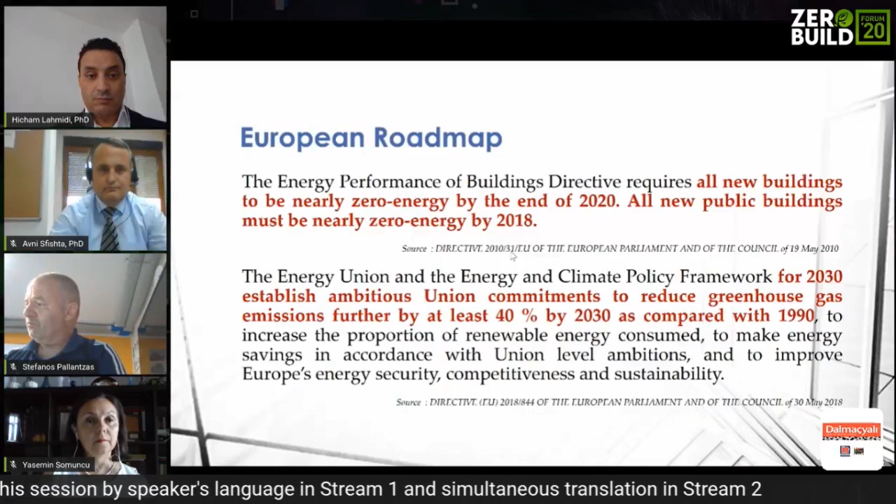On the same directive, we have other points related to improving the energy efficiency of the building stock, carbon neutrality, and near zero energy building. The union has committed to the development of a sustainable, competitive, secure, and decarbonized energy system by 2050. So under this directive, you can see we have a lot of objectives: short-term, mid-term, and long-term.

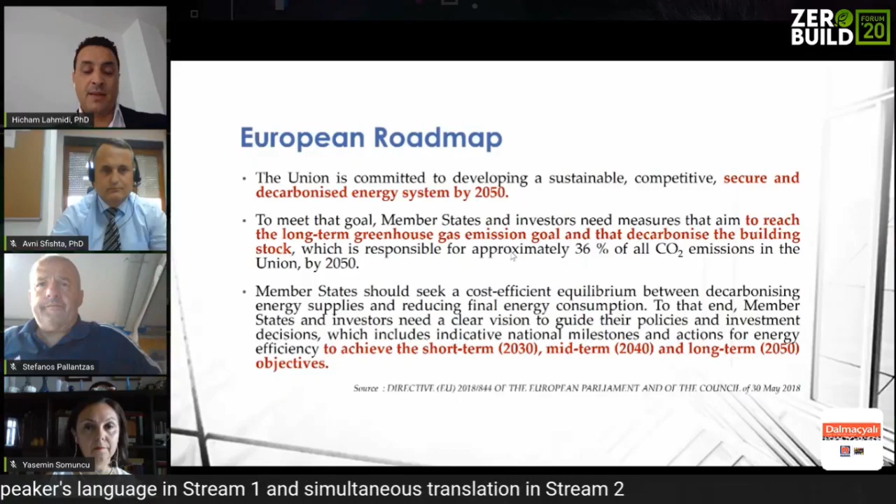Our idea is to establish a rule now and work on this roadmap step by step, and every 10 years make an evaluation of regional objectives, update regulations, and try to improve our system and create markets. This is the analysis of what happened at the European roadmap level.

Another point is related to mandatory energy improvement. I think you are aware that currently in Europe, and especially in France, we have a lot of obligations of means. Our objective from this year is to change this philosophy and move from an obligation of means to an obligation of results, so to focus more on verifying results rather than means calculations or something like that. This is the first philosophy adopted this year.

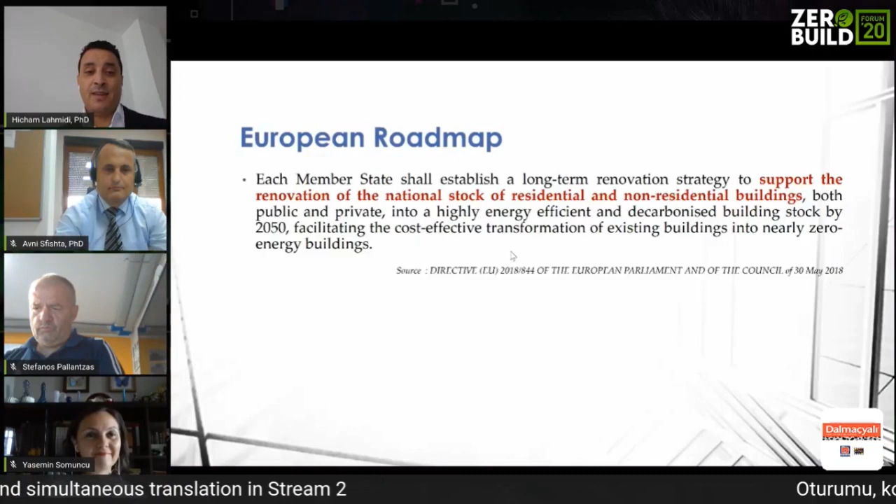And there is another one. So in each regulation in France, each time we have some rules related to fines. If there is no compliance with the regulations, you have to pay a fine. So from 2020, the ministry decided to move from this process of applying fines for non-compliance to establishing rules based on name and shame. If there is no compliance, the stakeholders, architects or engineers, will have their name on a blacklist, and name and shame will probably help move things in a good way and reach our objectives.

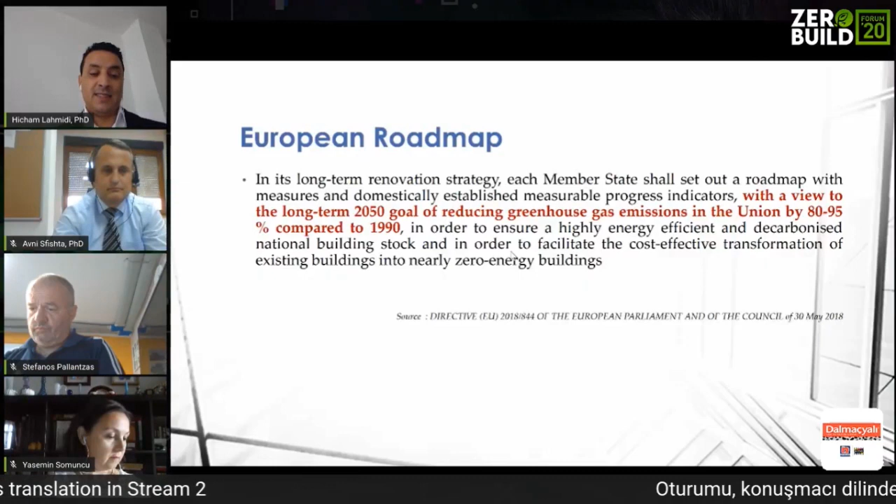Another point that is very important for us at the European roadmap, which we are starting to transpose into the French market, is a mandatory energy improvement for tertiary buildings. As you know, the big problem is related to existing stock buildings more than new construction. With new construction you can imagine what you want, but with existing buildings you have to take into account constraints, and it is not easy to move them to near zero energy or low carbon.

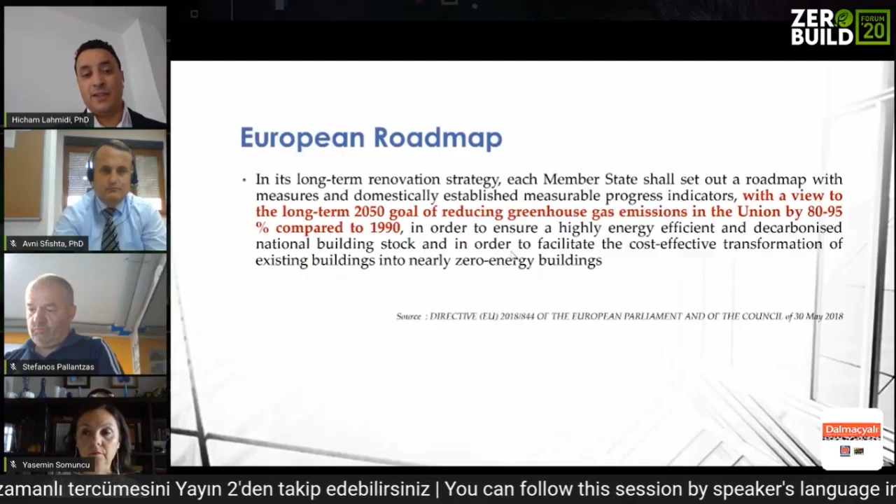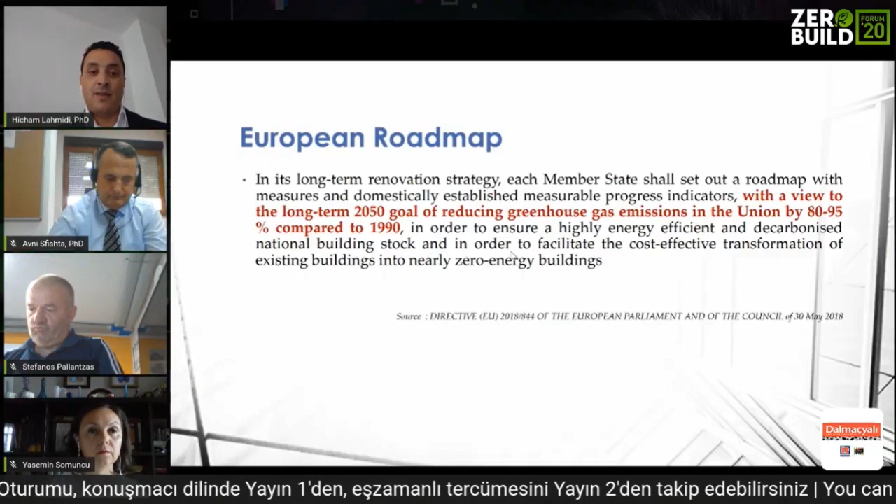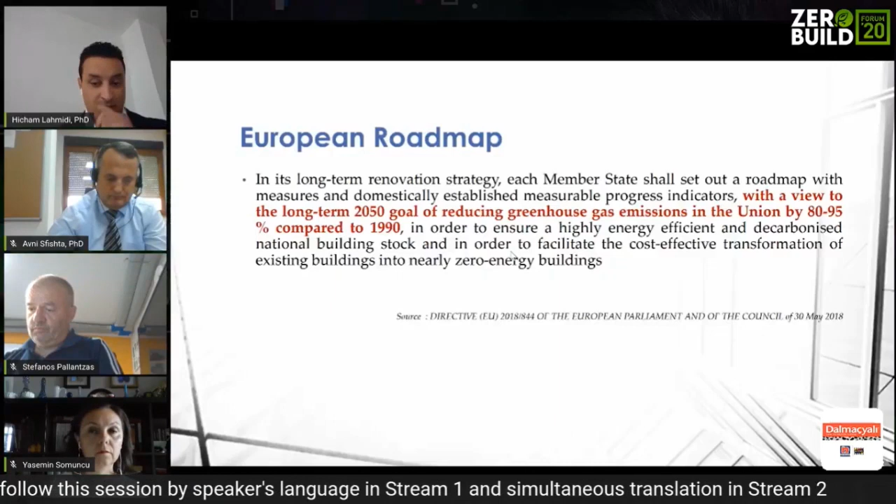So in France, based also on the European roadmap, we decided to establish rules from last year with a mandatory energy efficiency improvement for the whole tertiary building sector, with three steps of targets. The first target is fixed for 2030, the second for 2040, and the last for 2050. Based on the same rule I highlighted before, it is not an obligation of means but an obligation of results. You have to prove that you reach a reduction of energy consumption, and the level is very high: a reduction of 40% of real energy consumption by 2030, 50% by 2040, and 60% by 2050. This is what we are working on today in France.

And there is another subject in new constructions. Next year we will have a new regulation, and I will present in detail what will be the kernel of this new regulation. Let's move on after this short presentation of the relation between the European roadmap and the French roadmap, and focus on the French situation regarding buildings and energy consumption in general.

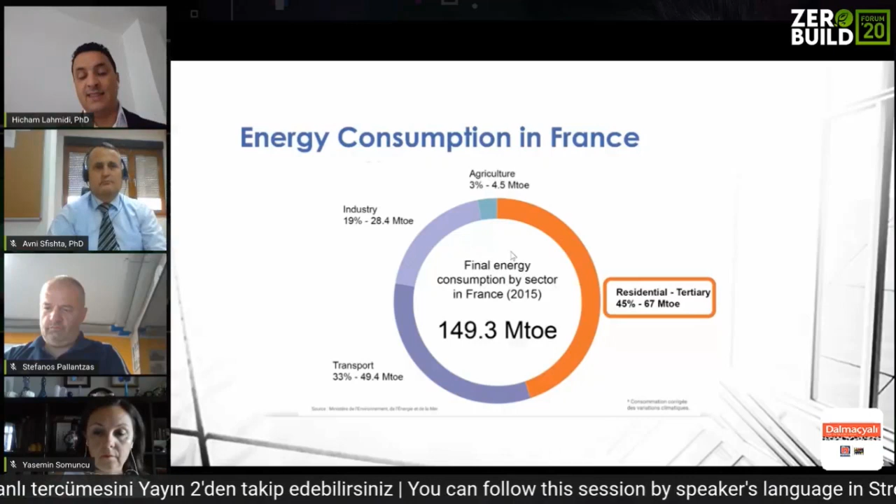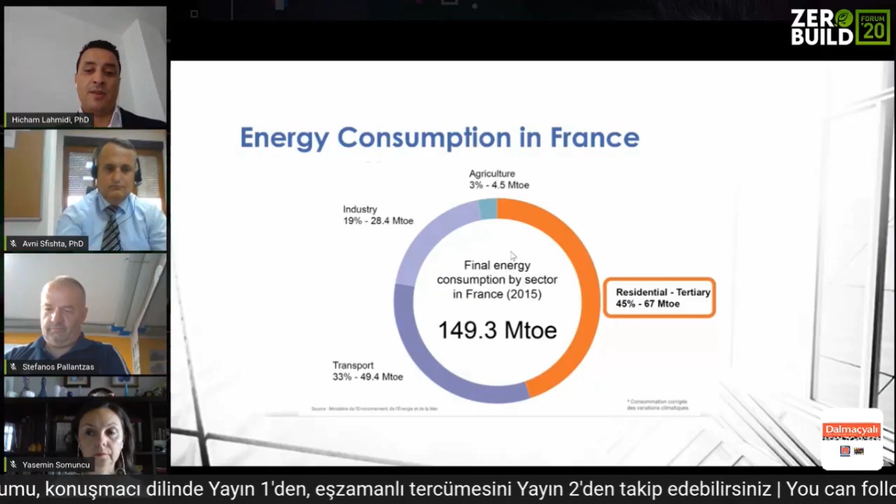We try to be an example in France and in Europe by reaching zero energy building for new constructions, low energy building for existing stock buildings, and carbon neutrality for part of our buildings by 2025, moving the whole sector to carbon neutrality and near zero energy building for new and existing buildings by 2050. This is our philosophy. Just to give you an idea, our energy bill for the whole sector in France is about $65 billion, so it's very important: if we can have an impact on buildings, we will probably have an impact on this $65 billion.

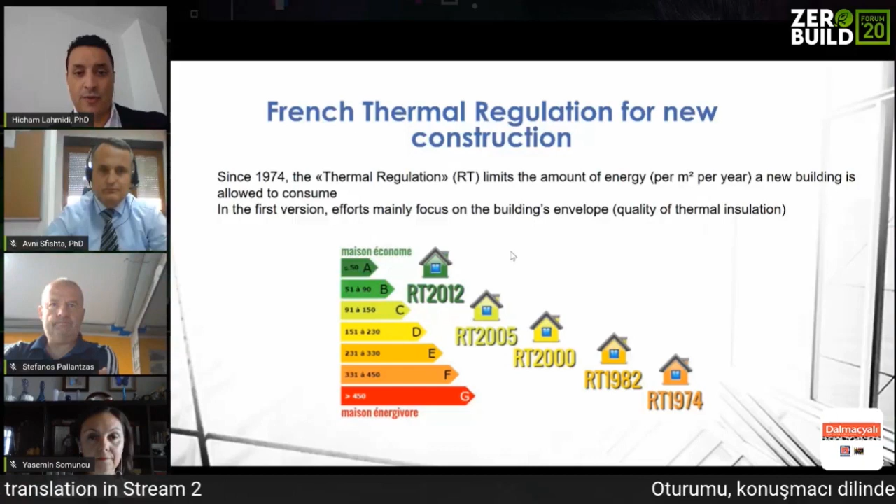Our philosophy is that we cannot just focus on existing buildings and forget what can be applied to new constructions. So our ministry decided to establish rules for renovation of existing buildings, but also for new constructions. The rate of new buildings in France is less than 2%. We have a big experience with thermal regulations for new constructions; since 1974 we established thermal regulations for new constructions, as an answer to the petroleum crisis. At that time it was just focused on insulation, and every 10 years we update our regulations to take into account the new context.

But the next generation of regulation will not be just thermal regulations. We are moving to environmental regulations, because we want to introduce life cycle analysis for the whole materials, but also zero energy building. So to reach this objective, we established a mix between low energy building and low carbon buildings, and it is now established. It's not published, but it will come into force next year.

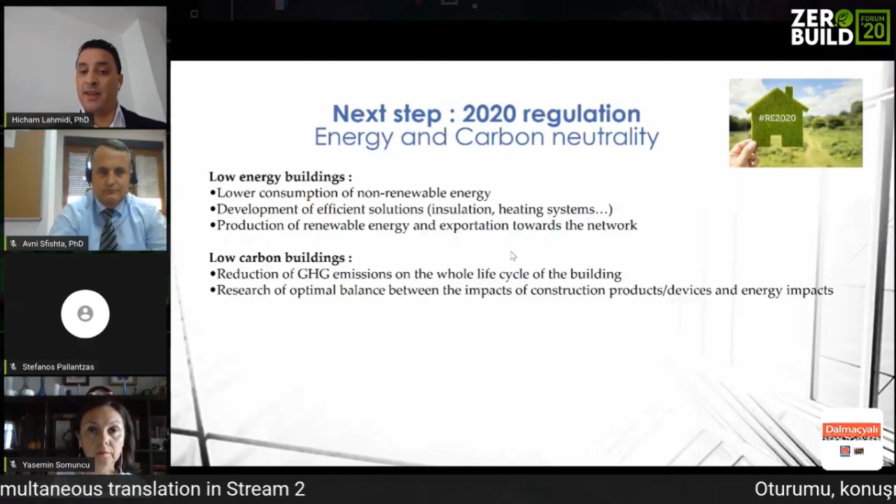Our objective for low energy building is lower consumption of non-renewable energy, development of efficient solutions, and production of renewable energy at the level of the building or the neighborhood. For low carbon buildings, our objective is a reduction of greenhouse gas emissions over the whole life cycle of the building, so each product will be characterized, and calculation will be based on the life cycle of each product.

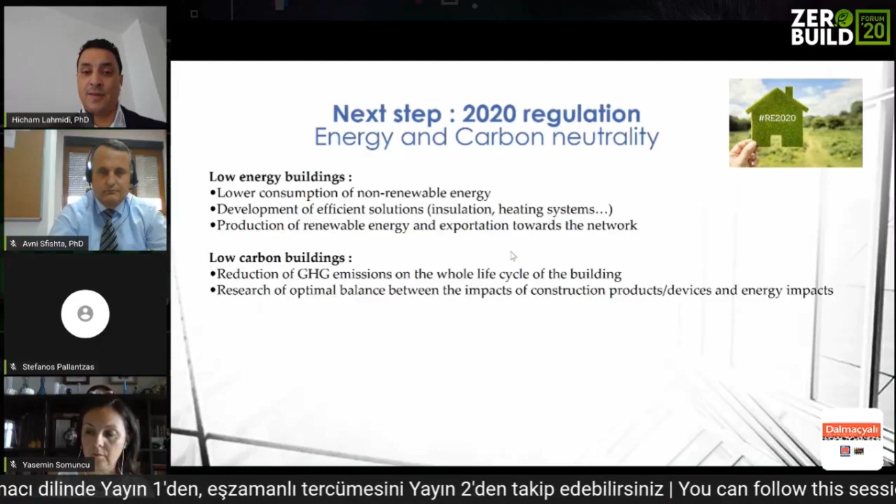The idea is to introduce the definition of circular economy at this level of regulation, and to create a movement under these two subjects, in order to create learning and, by the end, reach our objective. The philosophy will be the same as applied for near zero energy building.

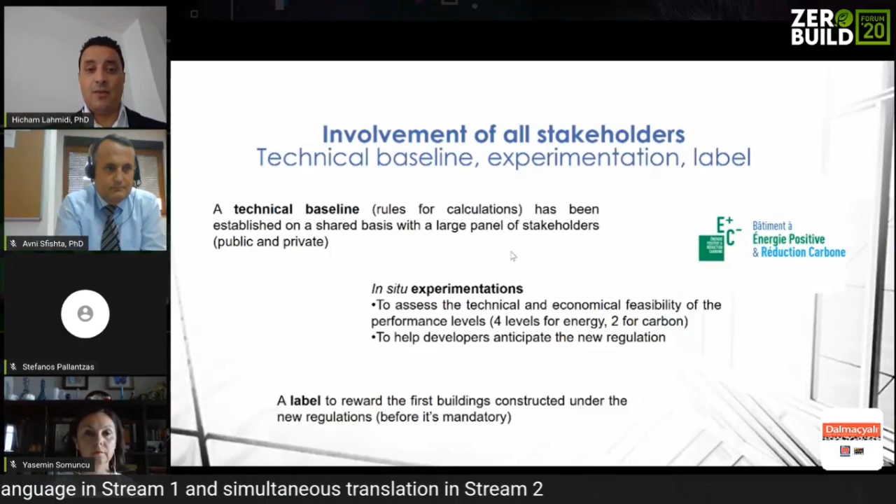As this is our first experience with the mixture between energy and life cycle analysis, we established a label: a positive energy and low carbon construction label. It was established under in situ experimentation, and the idea is to involve all stakeholders during 3-4 years to learn from these experiments, get feedback on the rules, update the rules, and introduce these rules and techniques into the regulations, which is currently ongoing.

Life cycle analysis is a new subject for architects, for engineers, for stakeholders, but also for administrations. So under this experience, we will have feedback and introduce these regulations, which will come into force next year.

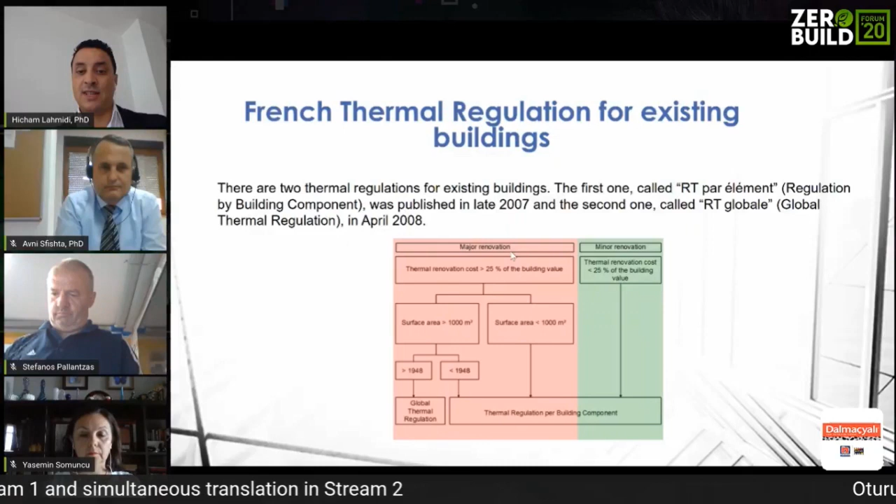Regarding existing buildings in France, we have thermal regulation with two levels depending on refurbishment: major renovation and minor renovation. Minor renovation applies to just building components, when we make replacements of windows or something like that. But if you have a major, very big renovation or refurbishment, you have to apply major renovation rules.

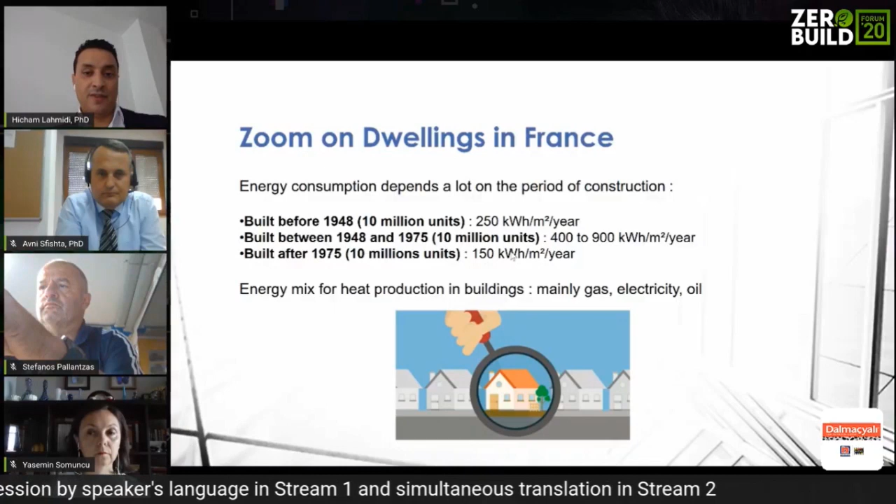This came into force in 2008. There is no project of updating the regulations, but what we observed in the market is that our dwellings depend on the level defined in each regulation. So before establishing the regulations, buildings built before 1948 - we have more than 10 million units - have a rate of about 250 kilowatt hours per square meter. After the war, between 1948 and the first introduction of regulations, the level is very high, between 400 and 900 kilowatt hours per square meter per year. But after the establishment of regulations, buildings became more and more efficient, so currently we reach around 150 kilowatt hours per square meter per year.

In France, we also decided to increase the sensitivity in big companies about energy efficiency. We started first with an obligation of means - obligation to carry out an energy audit without any obligation to actually improve energy efficiency. But once stakeholders in each company become sensitive to energy efficiency, they will make analysis and probably move toward improving energy efficiency.

If it doesn't come with this mandatory energy audit, it will probably come with the second text of law, related to mandatory energy improvement for tertiary buildings. The origin of this mandatory energy audit was also the European directive, introduced through Article 8, mandating energy audits for big companies, with exception for activity covered by ISO 50001 certification.

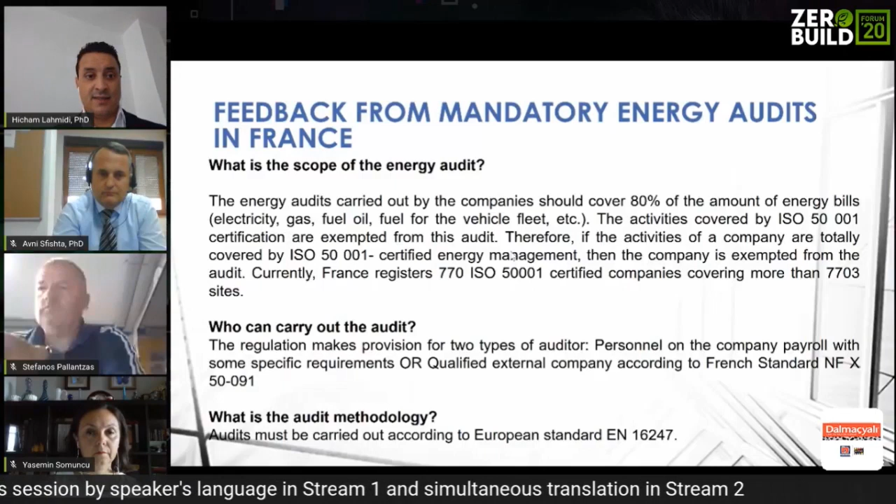In France, we decided that companies with some qualification can carry out the energy audit. The qualification is not related just to the person, it's related to the company. The methodology adopted and made mandatory for carrying out the energy audit was the European standard 16247. Lessons learned from the first campaign are...

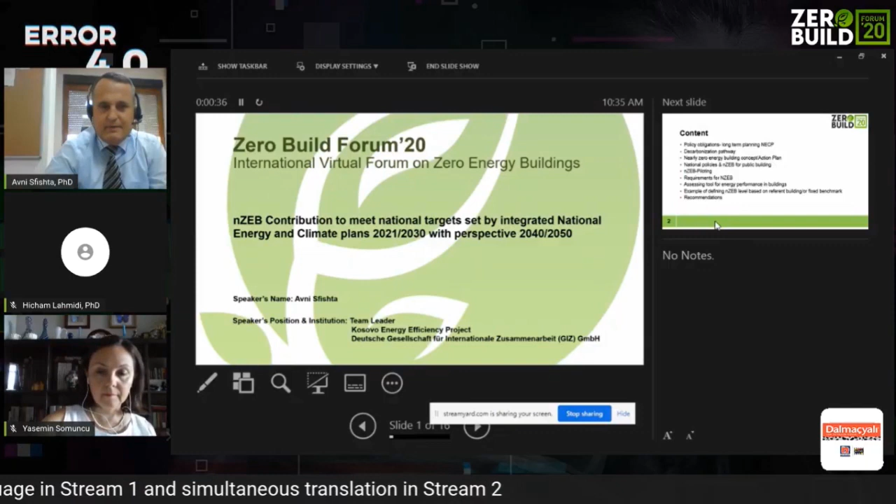Thank you very much, I'm honored to be together with you today. I will just try to switch my presentation. Can you see it now? Yes, we can see it, and if you can put it in presentation mode, it will be perfect. Yes, yes, thank you. Okay, we can see, Dr. Sfishta, we can see your notes also, so maybe, but it should be no problem. Yeah, I don't have notes on the side, so I think it's fine. Once more, thank you very much for having me today with you and also giving me the opportunity to share our experience on the development of the National Energy and Climate Plan, but related to near zero energy buildings, and in this perspective of long-term planning, 2021-2030, and having some goals towards 2040 and 2050.

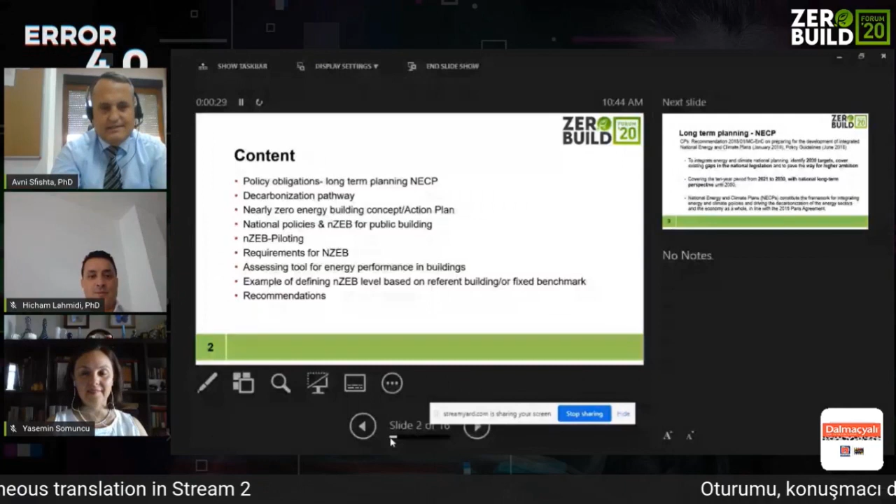So I was saying, I'm going to present today the long-term planning on national energy and climate plans in relation to building renovation, nZEB application, and setting the standards for this long-term planning for 2021-2030, with the perspective of 2040 or 2050.

As you most probably know, all the Balkan countries which are not members of the European Union are members of the Energy Community Treaty, and they have the obligation of a transposition process of the EU directives. In that line, in 2018, all the countries which are members of the Energy Community agreed on developing a national energy and climate plan, and also in 2018 a policy guideline was developed on how this plan should look.

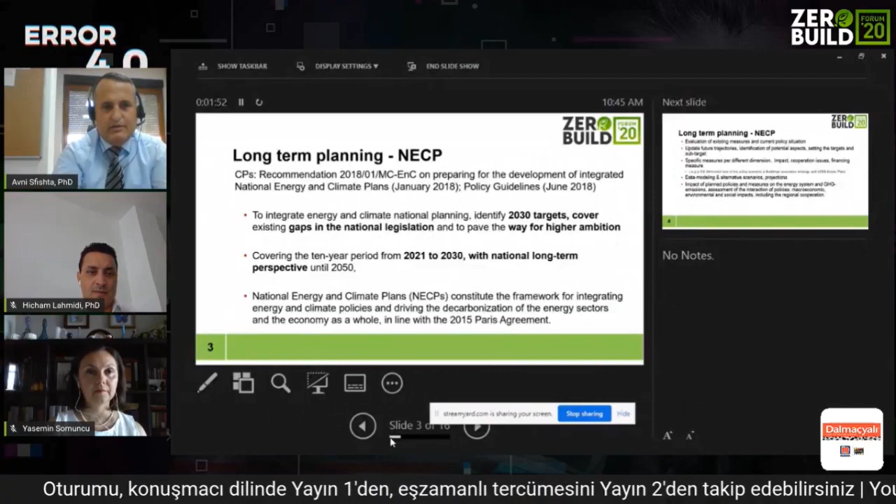The plan is an integrated energy and climate national plan that sets the targets, as I said, for 2030. It's meant to cover the gap in national legislation and pave the way towards a higher ambition on this decarbonization process. The plan constitutes the framework for integrating energy and climate policies and driving decarbonization in the energy sectors and the economy as a whole, and it's in line with the Paris Agreement.

What the plan consists of: first, the evaluation of existing policy and measures set in the country, then what should be the future trajectories, identification of potential aspects, setting the targets and sub-targets in different sectors or sub-sectors - how much can be achieved in terms of energy saving, what type of measures should be taken into consideration, and what are the impacts of these policy measures.

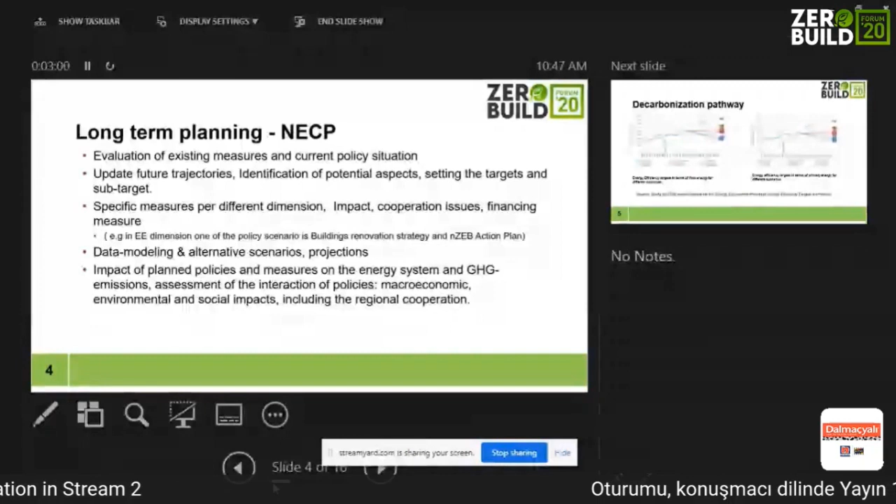In specific, one of the dimensions of energy efficiency, the plan also has the building renovation strategy. There is a near zero energy building action plan. On top of that, there is data modeling - data about energy consumption, about the policies and what effects these policies will give in the long run, but also in terms of impact on greenhouse gas emissions, interaction with other policies in the macroeconomic environment, and also social aspects.

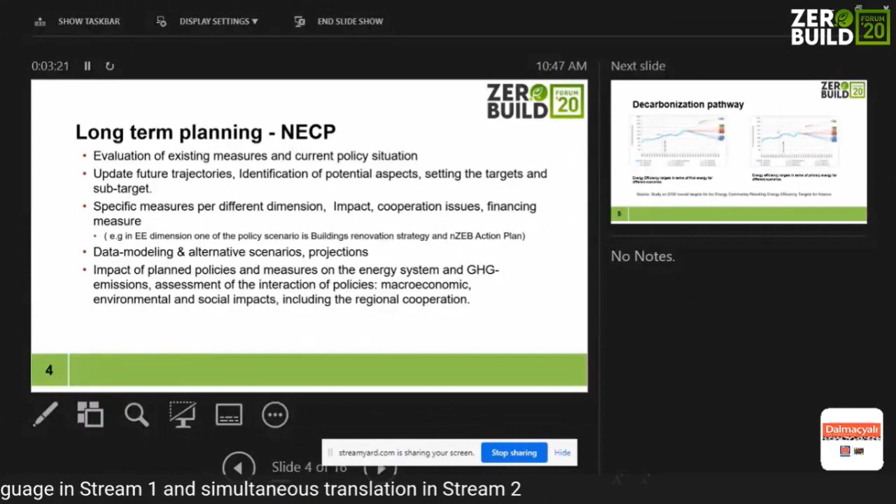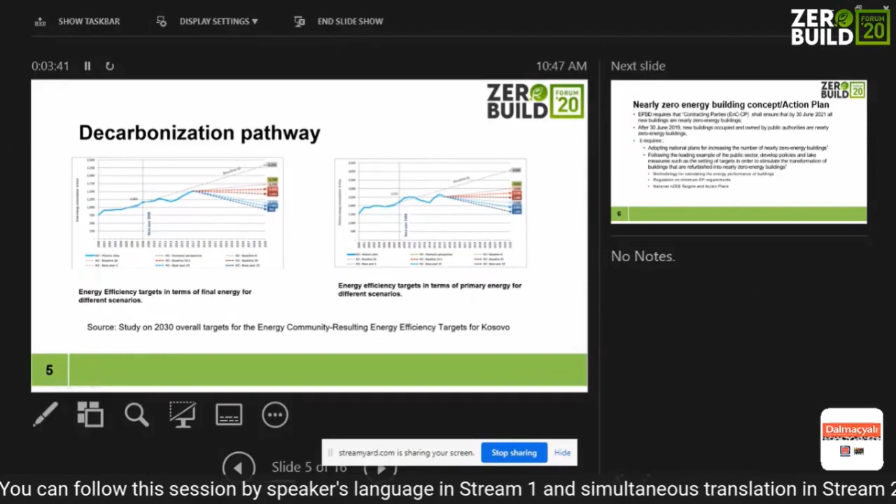So here is one graph that presents the different targets based on different policies, different measures, different political decisions. In the graph you can see, for example, if the country does nothing, what will be the total energy consumption, and based on different measures that will be taken, what could be the savings and what will be the overall energy consumption, expressed in final energy consumption and also in primary energy consumption.

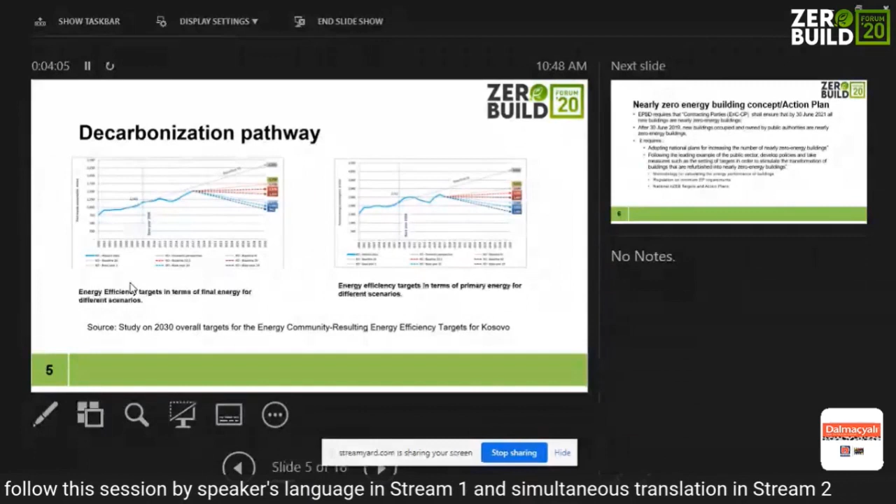Related to today's topic, I would like to link with my previous speaker: we have transposed the Energy Performance Building Directive, and for the contracting parties of the Energy Community, they shall ensure that by 30th of June 2021, all new buildings are near zero energy buildings. So for buildings that will be constructed, they have to meet a certain standard in terms of energy consumption, and of course be low energy consumption buildings.

According to the directive, after 30th of June 2019, new buildings occupied and owned by public authority are near zero energy buildings. This directive requires adoption of national plans for increasing the number of zero energy buildings, which we have developed. We do have the draft, and at the moment it is in a discussion process for adoption. It also requires that public authorities should lead as an example in terms of developing policies and taking measures in setting the targets.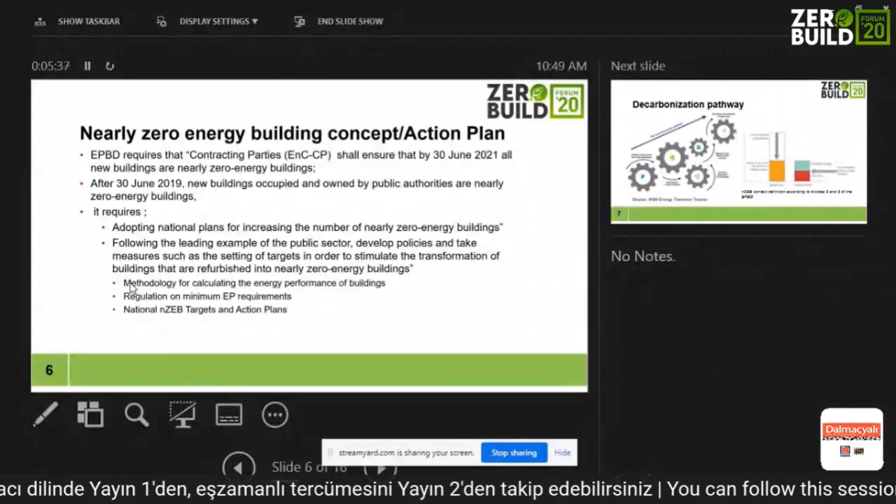On top of that, the government developed a methodology for calculating energy performance in buildings, which is in line with the Energy Performance Building Directive. They developed regulation on the minimum energy performance requirements, and also definition or setting of national nZEB targets on the action plan.

So what it means is we are talking about the current national requirements. The buildings have to be renovated or constructed at a level that reduces energy consumption to a certain level, and for near zero energy buildings, it means on top of that adding renewables, which contributes to reduction of fossil fuel use in very low amounts. By this, we talk about technology, we talk about the labor, we talk about the market.

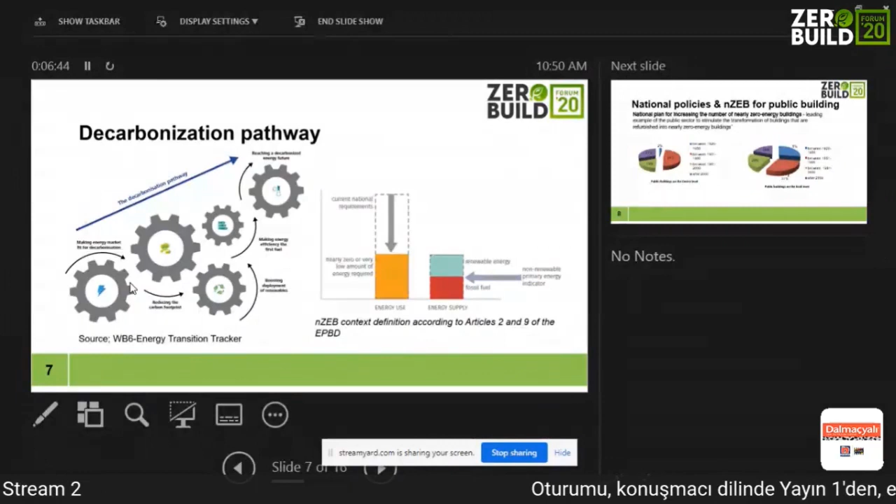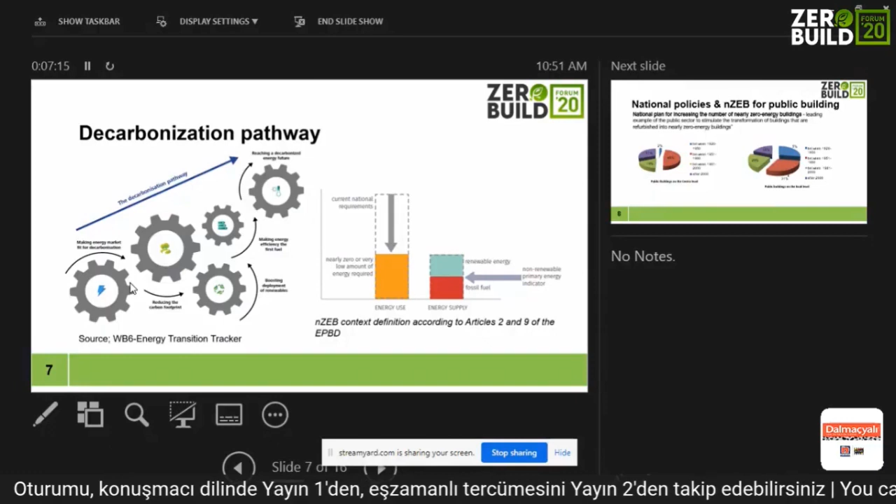Energy Community this year published this transition tracker, and I linked this area also with this tracker, because for example, on near zero energy buildings, we are talking about making the market decarbonized, reducing and contributing to reducing the carbon footprint, boosting development of renewables. As you will see on my next slides, a certain amount of renewables has to be produced on site or on the building that is near zero energy, and of course making energy efficiency the first fuel.

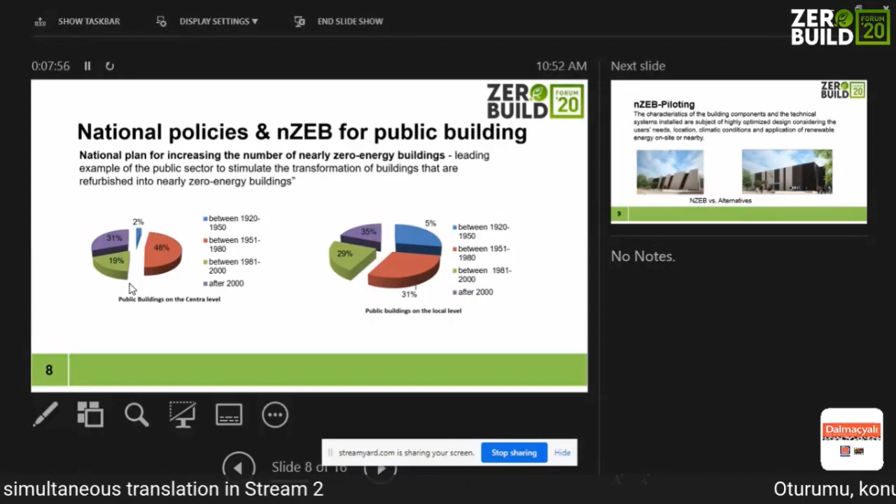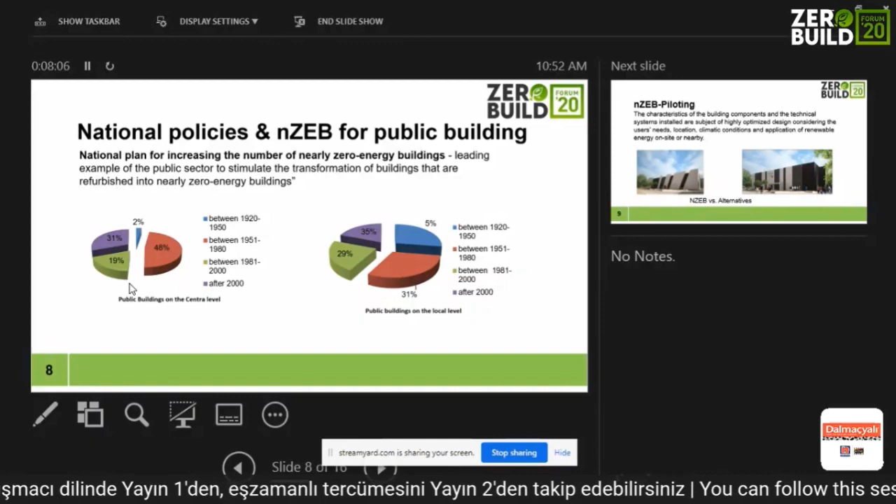What was done on the central level and on the local level, from the public authority side, is the national plan for increasing the number of near zero energy buildings. Most of the buildings, or a large number of public buildings, local or central level, have been audited. They have been split based on construction year to identify where there is higher potential for energy saving, and also to check what kind of measures and intensity of measures can be taken for these buildings to comply with the requirements I explained before.

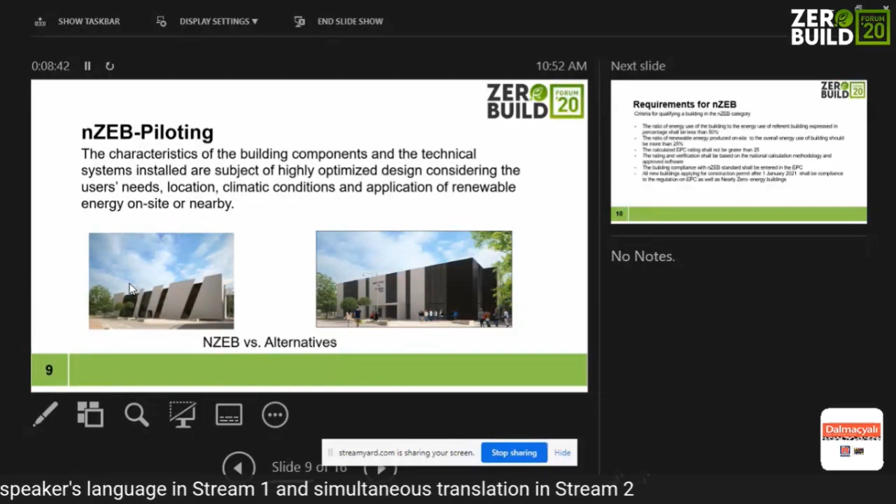Here I'm bringing one example, so it means nZEB doesn't have to be rocket science, it is a normal building. Here is one building which was designed on the nZEB concept, with different options provided by the architects and engineers. What it means is that the characteristics of these buildings, building components and technical systems installed are subject to highly optimized design, considering the user's needs, location, climate condition, and application of renewable energy on site or nearby.

So by our policies, what is considered a building that falls in this category of nZEB is that the ratio of energy use of the building to the energy use of the reference building, expressed in percentage, shall be less than 50%. It means by setting minimum energy performance requirements, we set, let's say, the worst acceptable standards of energy efficiency in buildings which are accepted.

But if we want to reach a level where the building falls into this nZEB category, these buildings have to be doubled in terms of better insulation, having better optimized technology and application of renewables. Then the ratio of renewable energy production on site to the overall energy use of the building should be more than 25%.

In the energy performance certificate, it has to be also rated, and the rate should not be more than 25. So it's not in terms of kilowatt hour per meter square annually, but it's based on comparison between the building that we are assessing and the reference building.

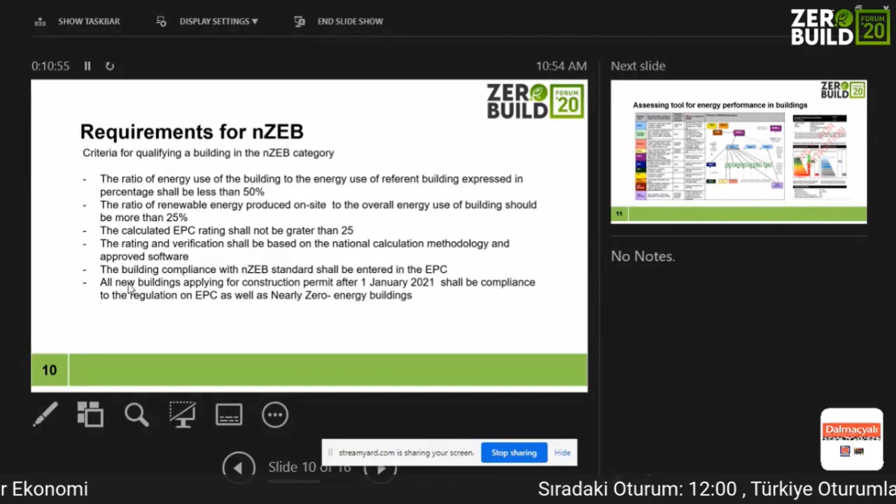The reference building is created by the calculation tool, by the software. So when you insert the data inside, the software in parallel develops, or creates, the same building while taking into account the minimum energy performance requirements. So it means the policy requirements that are set a priori are in the software library.

But when we do assess, we put all the data from the real case. Then at the end, when you do a calculation, the software will make a comparison between the building that fulfills the standards and the building that we are assessing. The rate between these two, when you do the calculation, should not be more than 25. Then the verification should be based on the national calculation methodology, so basically how this assessment of energy performance of the building is done should be in line with the calculation methodology.

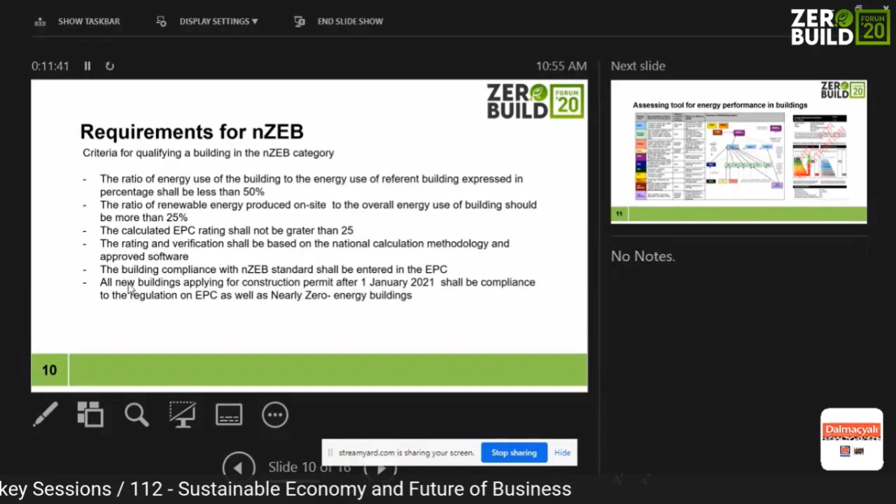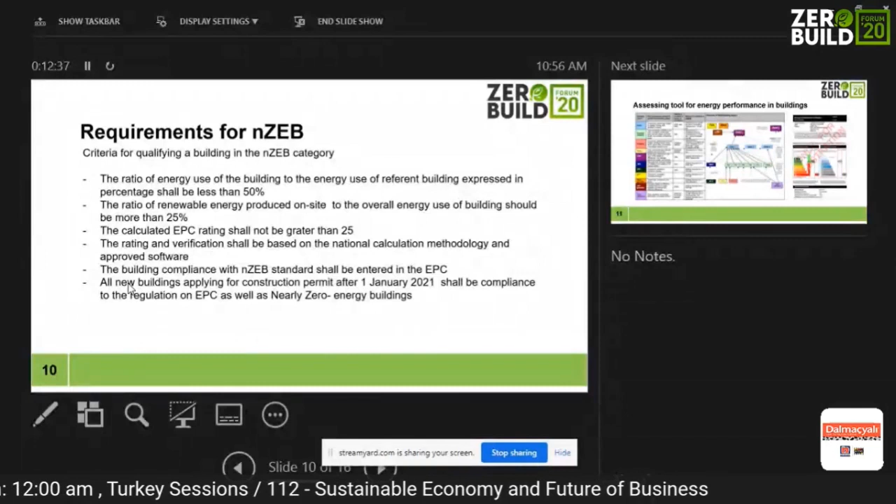From the 1st of January 2021, all new buildings applying for a construction permit in the country have to be compliant with these minimum energy performance requirements, and also be equipped with an energy performance certificate at the design level. So when the building is being designed, an energy performance certificate is issued for the design, and when the building is constructed and reaches the phase of technical acceptance, or the certificate of usage as we call it, another EPC should be conducted to check if the building complies with these regulations.

So how is this assessment done? Basically, when assessing a building for refurbishment or a new building, you split the building into different zones, and for each zone you assign the envelope of the zone, and what type of heating, ventilation, or air conditioning system is in that area. The division of these zones is based on the uses or purpose of these areas, and also some technical criteria, for example around lighting or natural lighting.

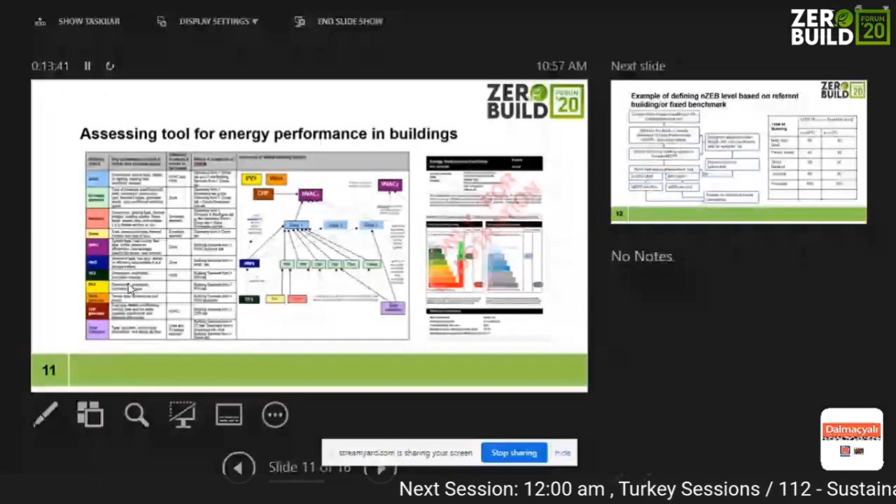So you assign all these systems to the zones of the building you assess, and then you do a calculation, and based on this you get the rating on the certificate. To meet minimum energy performance requirements, this rating should be between B and C, and if it's at nZEB level, then it's between A and B.

The process itself for assessing such buildings is: you create a virtual model of the building in a calculation assessment tool, and then you attribute the fabrics of the building you assess. These minimum energy performance requirements, or minimum U-values accepted by the policies in force, are already in the system. You define the technical building systems which are in line with these minimum energy performance requirements, then you run the calculation tool, and you might get two types of results.

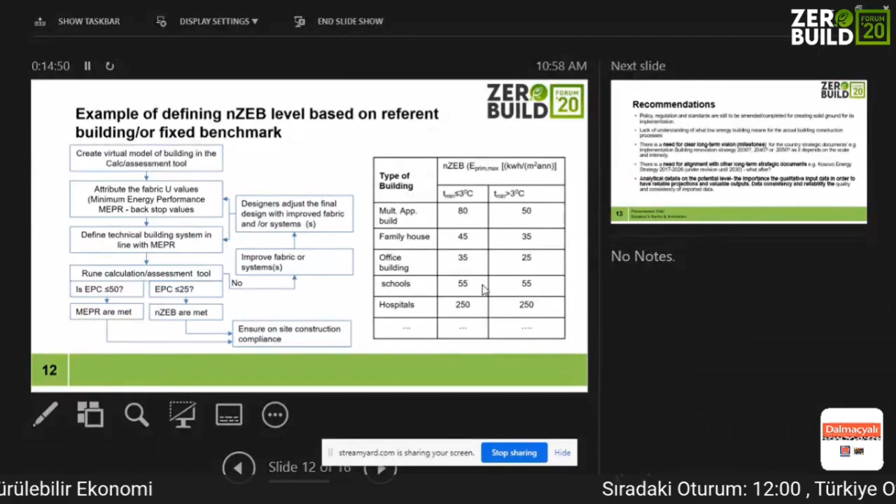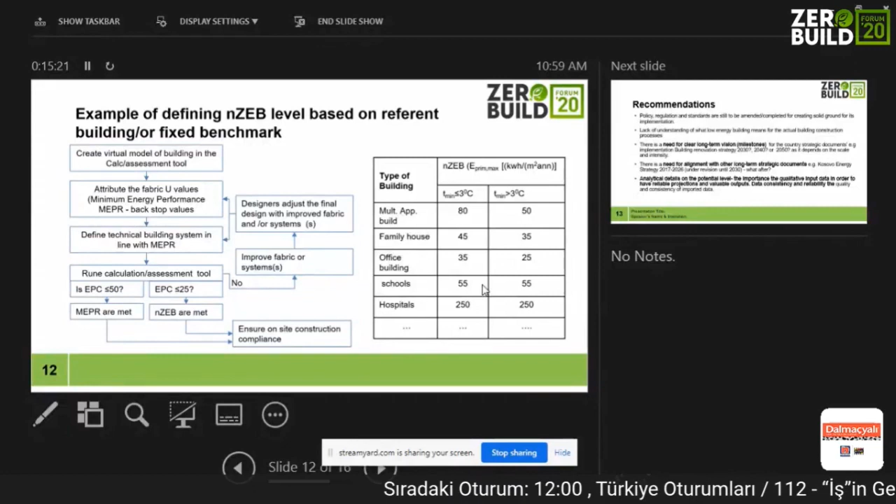First, if the EPC is less than 50, it means the building meets minimum energy performance requirements, and it can go for construction, or be approved for issuing the permit. If it's less than 25, then we say the nZEB standard is met, and the same procedure applies. But if these two standards are not met, it means that in the design phase the building should go back for improving the fabric or systems, and it becomes the task of designers and engineers to improve the fabrics or install better, higher efficiency systems in the building.

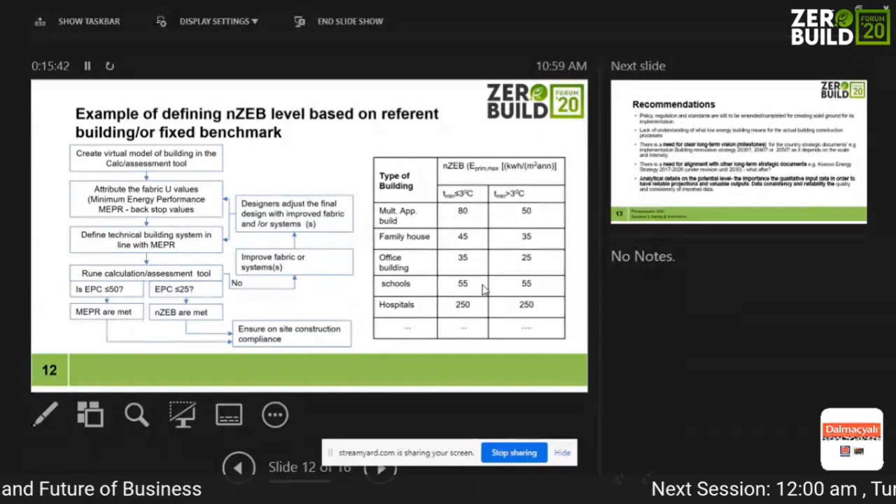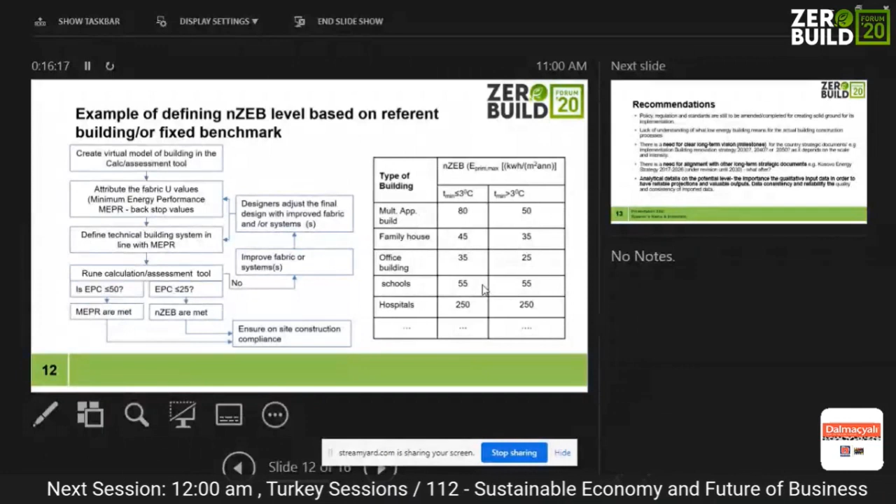Some countries have adopted, just to share with you, a sort of benchmark for how much primary energy consumption should be consumed by a certain type of building based on different climate zones, in order to fall into the category of nZEB. Here in this table on the right, you can see, for example, that for buildings in an area where the average outside temperature is less than 3 degrees, depending on the type of building, there is a total primary energy consumption allowed for that building to be nZEB. If we're talking about warmer climate zones, these figures might be a bit different.

Now I will come to some recommendations based on our experience here. I would say the policy, regulation, and standards are still to be amended or completed to create a solid ground for implementation, as this is quite new, and these obligations for the countries here came quite late, in 2018, 2019.

So basically, some of the construction companies do not really think in terms of seeing the life cycle of the building, how much energy this building will consume during the life cycle. They are looking more on this economic perspective, but not on these criteria.

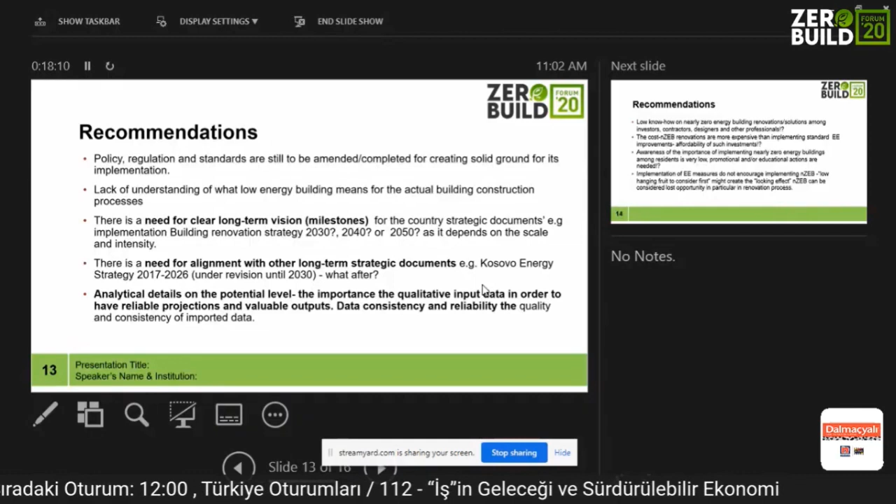Then another element is these long-term visions or milestones. As I said, we are almost in the process of adopting a building renovation strategy, and one of the questions still in discussion is what will be the targets, the milestones for implementation of such building renovation strategy. Would it be 2030, 2040, or 2050? Because it depends on the scale and intensity of such intervention.

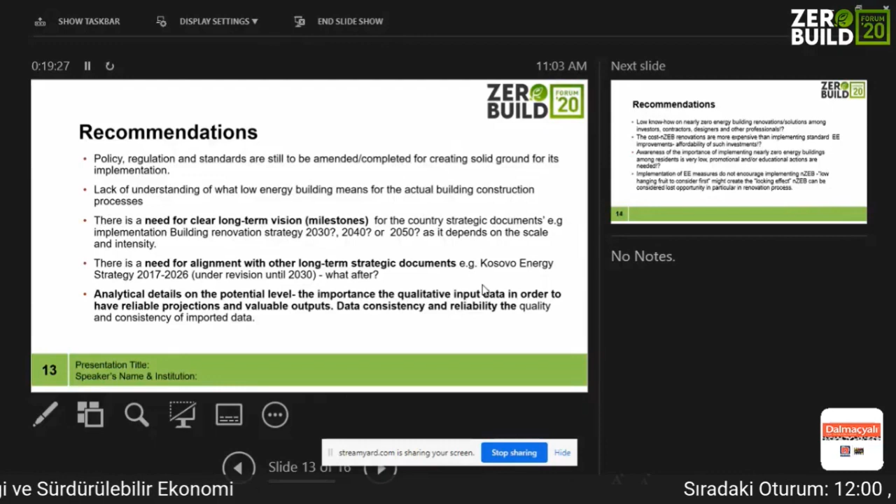Another element we noted is the alignment of the building renovation strategy with national energy strategy, which currently runs up to 2026. It will be revised until 2030, but the question is what happens after. So when you do such analysis, the importance of qualitative data and input data is highly relevant, because it gives you projection and valuable outputs. Data consistency and reliability in such planning are of high importance.

I also said on my previous slide that there is still low know-how on near zero energy building renovation solutions among investors, contractors, designers, and other professionals. These buildings are seen as quite complex, and some people feel scared when discussing whether it's possible to reach it or not. But I think over the years this will be overcome.

Then another element is the cost of renovation or implementation of such measures - it's about the affordability of such investment. Here we might have one of the cheapest energy prices in Europe, in Kosovo. But the price for construction materials does not differ much. So when you calculate the simple payback period, or do an economic calculation of such investment, it is also a question mark.

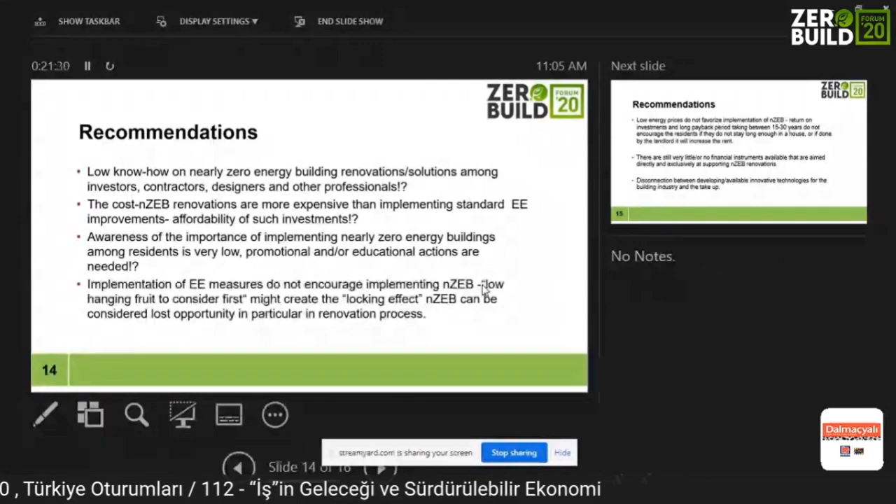Is it feasible, or is it attractive for people to make such investments? There are quite a lot of people who want to renovate, for example, their houses, but they don't know what to do or how they should do it. So basically, sometimes they rely on construction companies, sometimes on engineers and designers. So one area that might be helpful is promotion and education, or awareness raising for the people, for the residents.

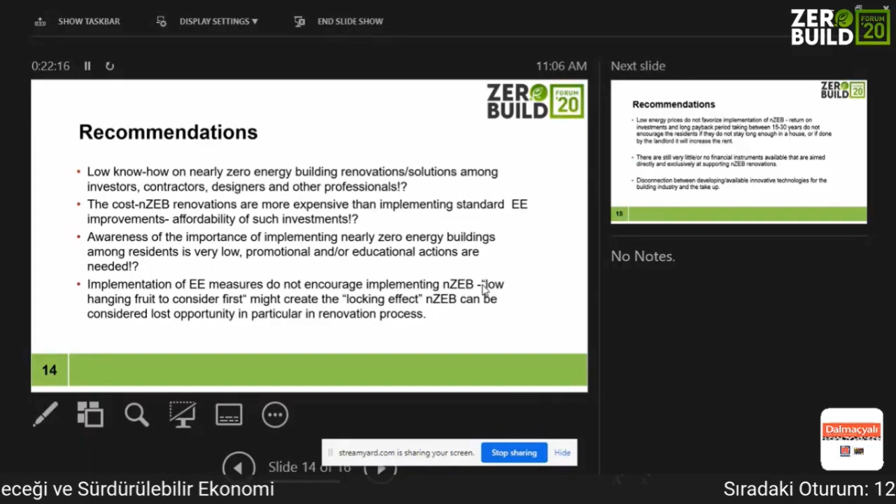So far we usually discussed energy efficiency, low-hanging fruit measures that might be the first to do, because they have a very short simple payback period - quite attractive for investment. But on the other hand, comparing to the nZEB standard, there is a question: are we creating a sort of locking effect against applying nZEB? Because at some point it might be difficult to convince the tenant to invest again after a couple of years to increase the performance of such buildings.

So this might also be seen as a risk or a lost opportunity for renovation in the next phase. As I said, low energy prices do not favor implementation of nZEB because the payback period of such investment is quite long, between 15 to 30 years. It also does not encourage residents if they don't stay long enough in a house, or if it's done by a landlord, this might increase the rent for them. So this is something that should be considered when we talk about these projects.

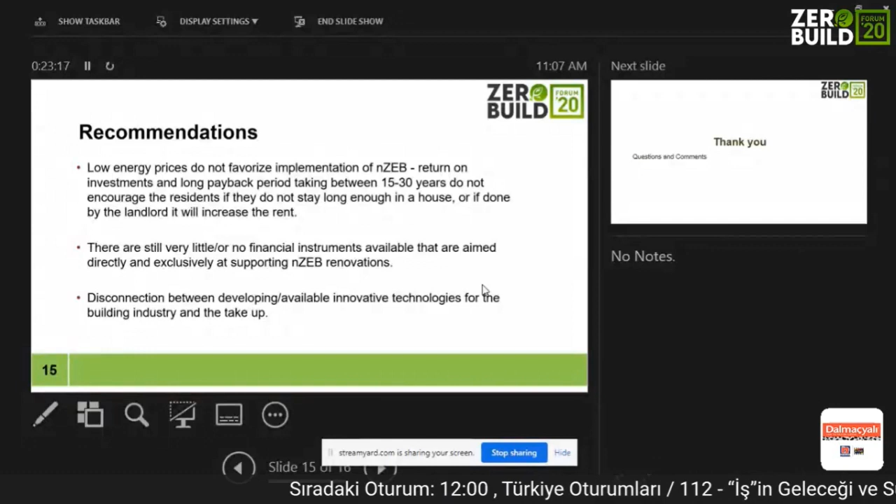We still don't have any financial instruments available that are aimed directly and exclusively at supporting nZEB. There is a fund for energy efficiency in the country supporting implementation of energy efficiency measures, but it is not targeting nZEB - it targets meeting minimum energy performance requirements, and at this stage it is covering only public buildings, central or local level. It is planned that from next year they will look into how the fund can be extended to the residential and commercial sectors.

Yeah, so by this I would conclude my presentation and hand over to you, and yeah, thank you.

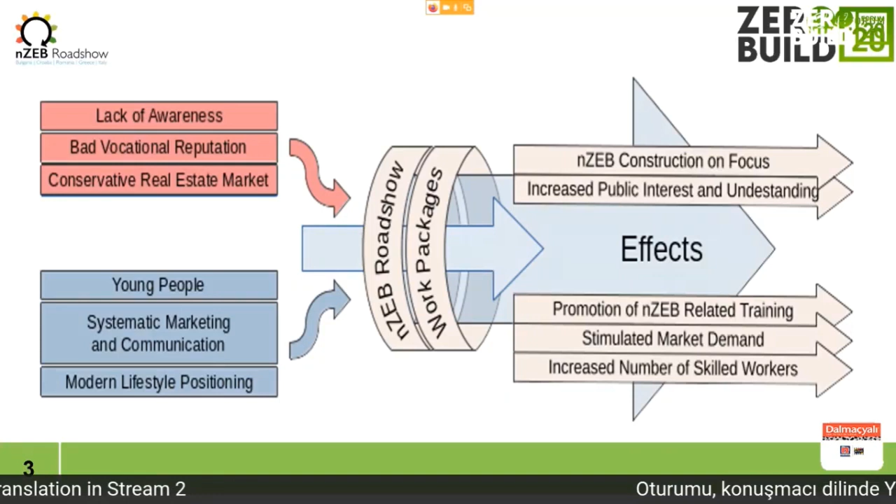This project aims to organize national scale marketing and communication campaigns in 5 European countries, focused around nZEB weeks, organized in 3 to 5 selected cities. In Greece, we will do it in 10 cities. The nZEB weeks will include construction products and real estate fairs, practical demonstrations, real-time nZEB construction, training courses for designers and construction workers, information sessions, free consultations for citizens active on the real estate market, and also on-site training at public building renovation sites, career orientation centers, and construction job fairs.

So we will try to do nearly everything that the government and the state have not done during the last 10 years. We will stimulate the demand for energy-related skills of construction workers and specialists, because the problem is very, very big in both sectors.

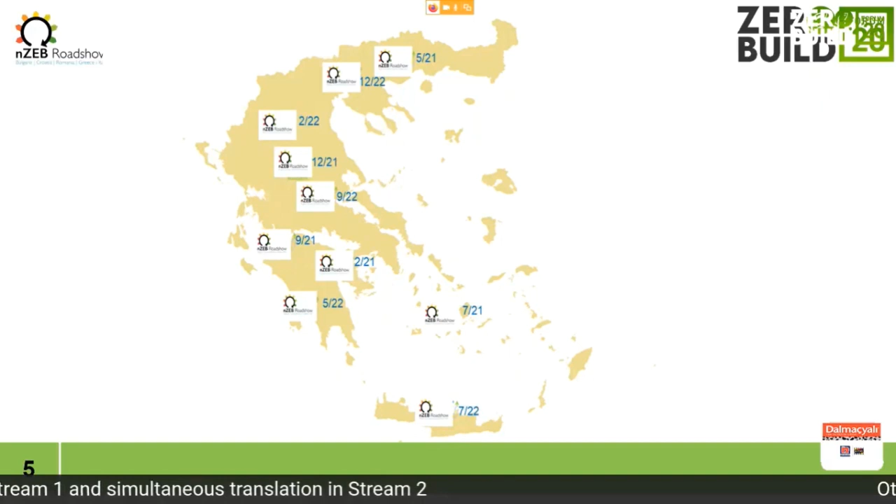Our program in Greece, we have decided to do it not only in 3 to 5 cities as was the obligation in the European proposal. We will do it in 10 cities over the next couple of years, not in Athens, but in several other cities in Greece. We will go to cities that have a very hard winter, to show what happens if you design an nZEB building. And we will go also to islands to see what happens in these buildings during summer.

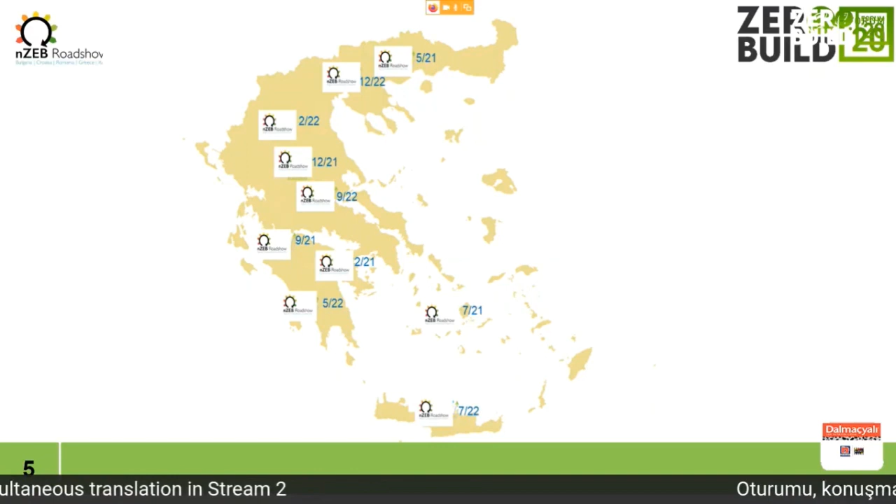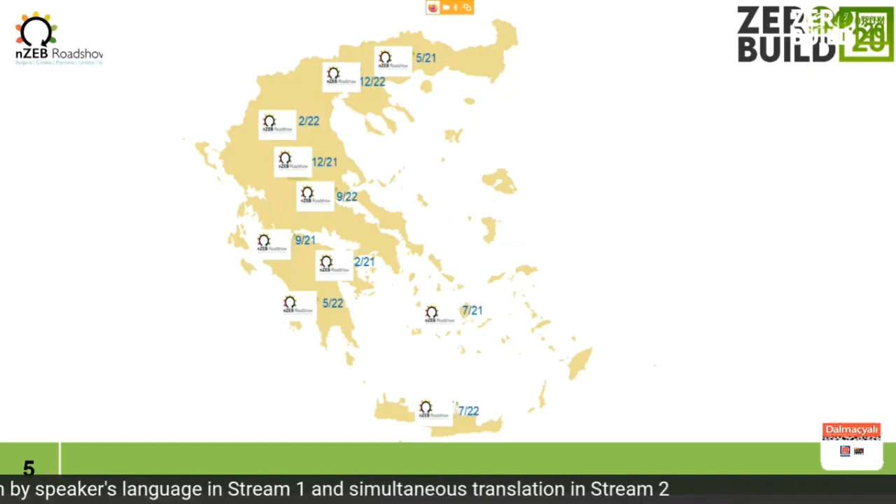This is also an issue, especially in the Mediterranean area. For northern European countries, it's easy, or difficult, to design passive house or nZEB buildings appropriately, and they don't care much about what happens in summer, although during the last years they are starting to understand what is going on with overheating. In Greece and in Mediterranean countries, the problem is much different. Although there is always demand for winter solutions, the main problem is summer, and you need a lot of knowledge to understand and do the right thing.

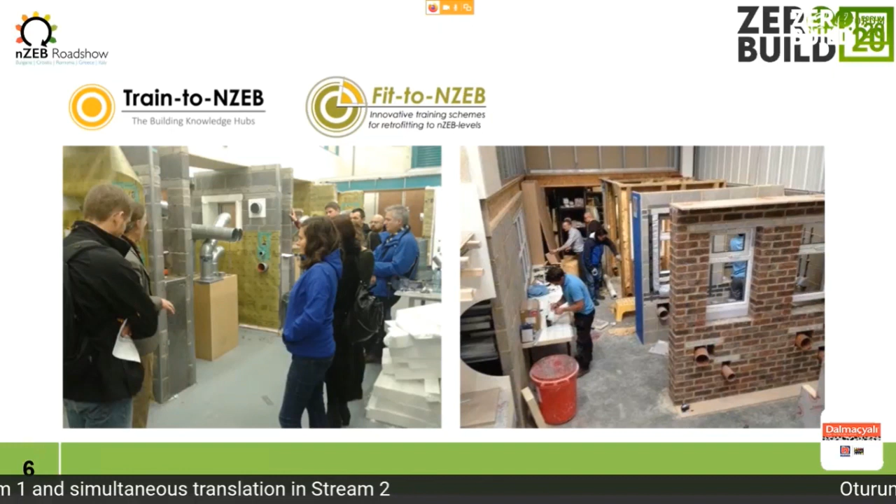There was also, in Train to nZEB, I believe the Technical University of Izmir participated. So there is a building knowledge hub in Izmir. I don't know if you use it now.

So now the idea of the third part of the program is to put this building knowledge hub on wheels, let's say, and bring it to the rest of the country. So to go to another 10 cities and do the same things we did in Athens or in the capital of another country. We will use, for example, real estate fairs, although now with the coronavirus, I don't know if we will have any kind of fairs.

But we will see what we can do on that. We will have practical demonstrations, so we have all the materials needed to show to any kind of people - engineers, technicians, students, pupils, ordinary citizens - how it works, how it goes with nearly zero energy buildings.

We will have, of course, training courses, the classical training courses for designers and construction workers, which also lead to a certification if they want - a passive house certification, designer or tradespeople - and also now PHPP experts. So we will do a third training course improving knowledge in our main software for passive houses and nZEB, the PHPP, and you get also an additional certificate if you want as a PHPP expert.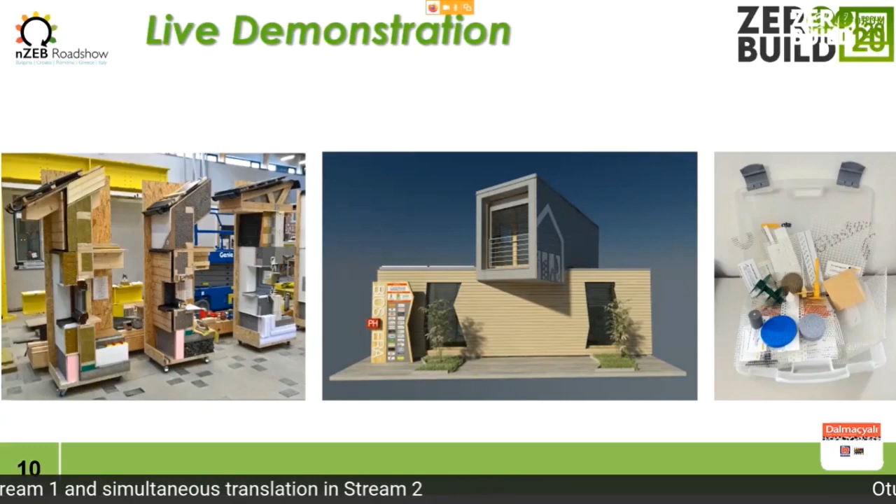Another idea, which will be implemented in Italy, is this unit, this building that you see in the photo in the middle. The building will be transported with a truck, and inside the building there will also be several things to do. I will show you later.

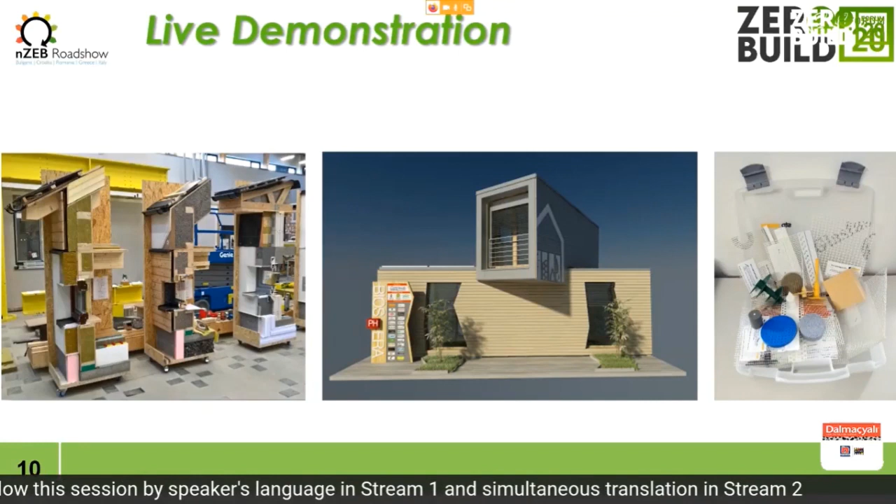The third idea, which will be mainly implemented here in Greece, is that we will have a minivan with a lot of magic things inside. It will be a little bit like Sport Billy - a small bag or something, but many things inside. I will show you details now.

So the mobile home units, as you see some examples here from Italy, will be a complete building, a complete small house, where you can see all the systems working - from windows, from insulation, from PV panels, from hot water, from heat pump, from everything.

The second one will be our minivan with a lot of practical activities and training. The third one will be these mock-ups that will be created on site, on the city maybe, if the city wants that, or we will bring some of them together with us in the vans and leave them there for several days.

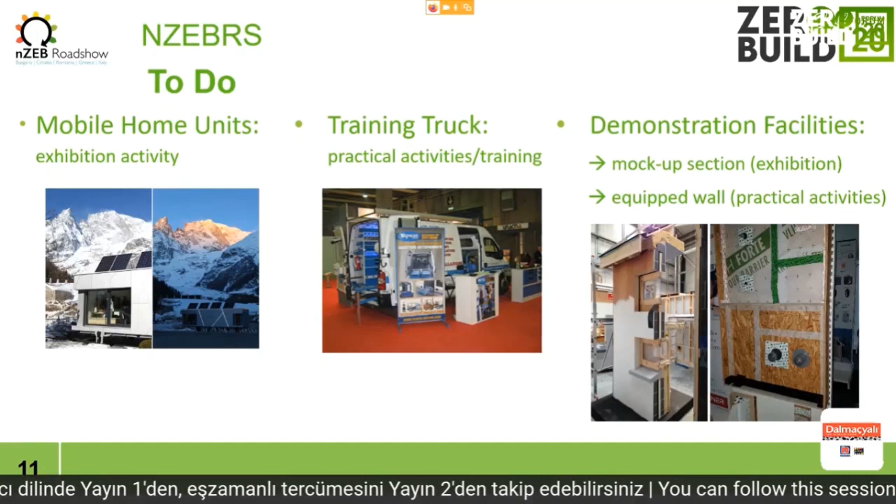In the mobile home units, we will show inside to the end users different window frames, insulation, air quality systems, and so on. And we will also play games there with them and with applications. I will tell you later.

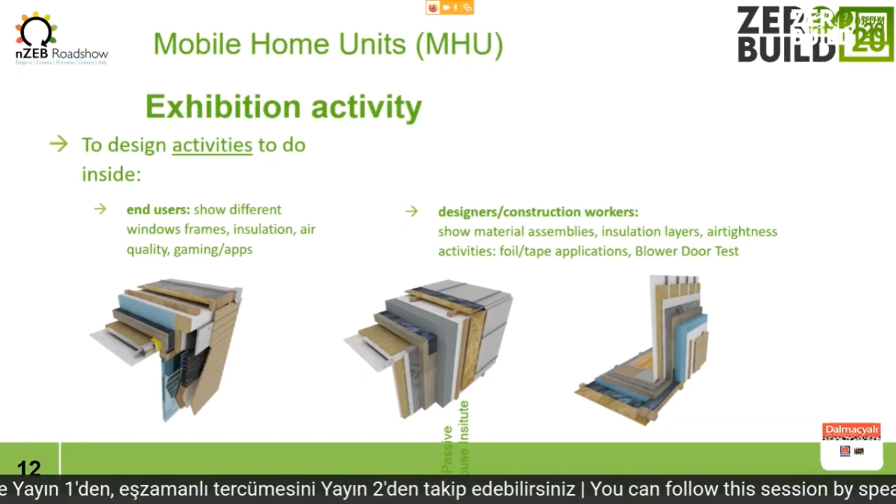But also to the designers or construction workers, we will show material assemblies, insulation layers, air tightness. We will do activities with foil and tape application. We will do blower door tests, which is mainly unknown in Greece. Only we, who care about passive houses, do blower door tests at the moment in Greece.

This is also an inside of a mobile home unit, as you see, with several applications, like living experience, like gaming, like ice challenge.

Ice challenge is an idea where we create two small boxes, two small houses. One is built as conventional, according to conventional national regulation. The other is built with passive house requirements. So we put, let's say, 50 kilos of ice in every small box, and we bet how many kilos of these 50 kilos will remain after 1 week in each box.

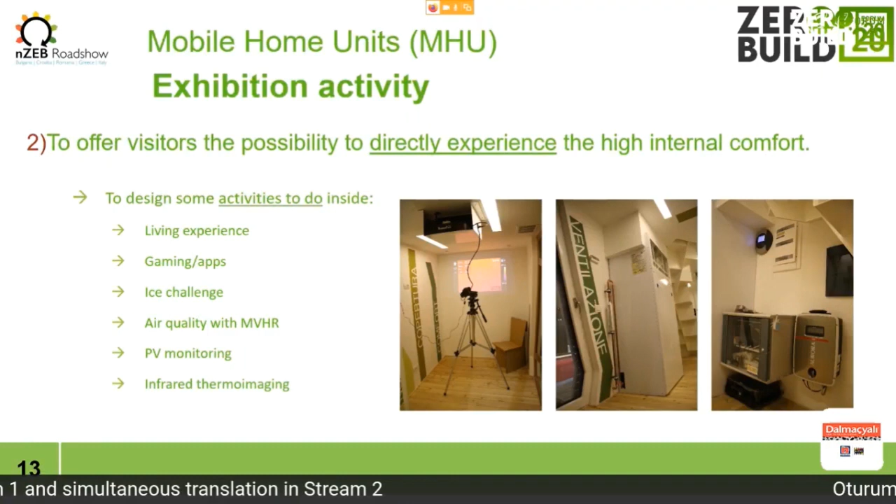And the winner will take, let's say, a weekend in a passive house hotel or a weekend in another passive house, and so on. So this is the idea of the ice challenge. We have done this all over the world many times now. It's a very interesting happening, and people like this and come then and ask about nZEB and passive houses.

So other things that we will do in the mobile units will be air quality with ventilation units, PV monitoring, infrared thermal imaging, and so on. Other things also about smart buildings, and we will have also the performance of the building shown in monitors.

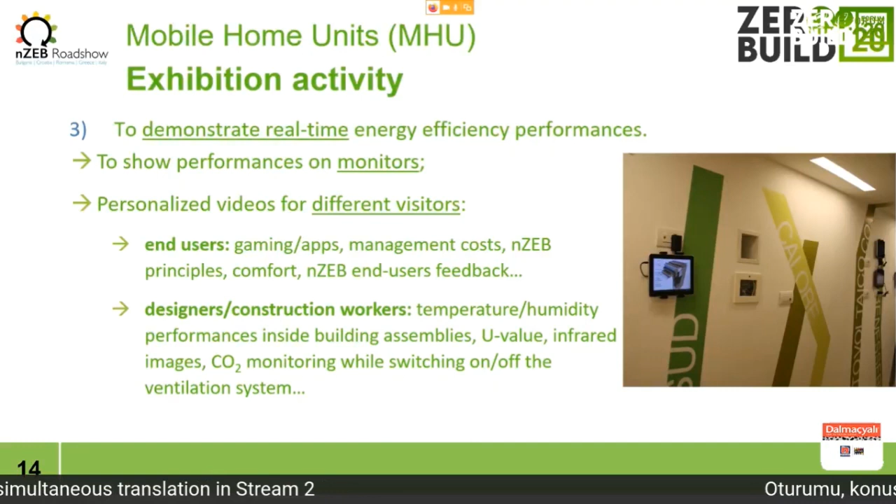We will do a lot of things more with small training toolboxes and so on. We have also decided to go to cities where we already have certified passive houses and nZEB buildings, so we will include visits to these houses in the nZEB week. We will show people not only mock-ups and equipped walls, we will show them the real house, and give them the opportunity to discuss with the local end users, which is very important.

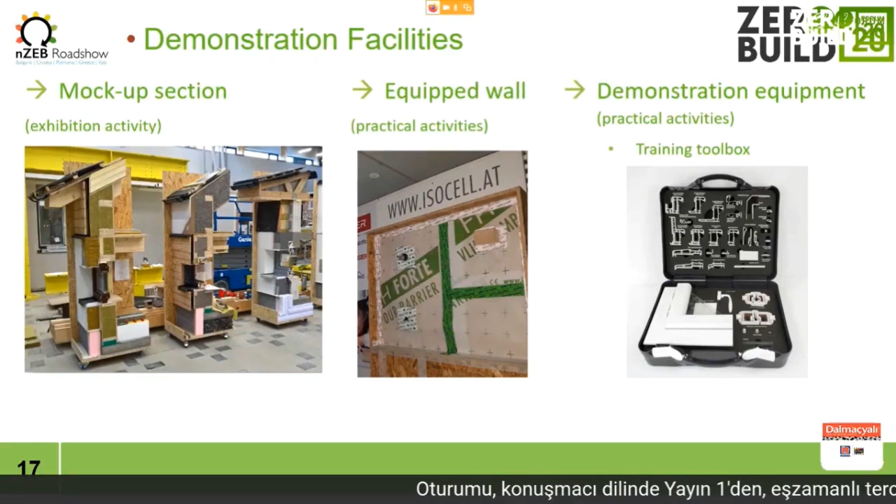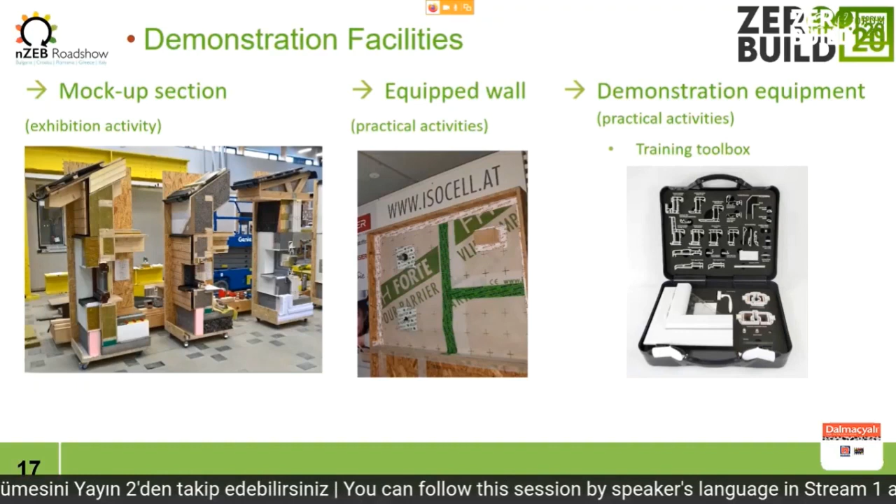My experience shows that the biggest fan of the passive house and the nZEB building is the end user. The end user who has problems understanding, before construction, many things about how to create an nZEB building, at the end is the guy explaining very well the way of living in such a house. It's very interesting to bring other people to hear the end users describe how they feel in these houses, because for me it's the most important thing that the way of life and quality of life in these buildings is much better than in the conventional buildings we live in now.

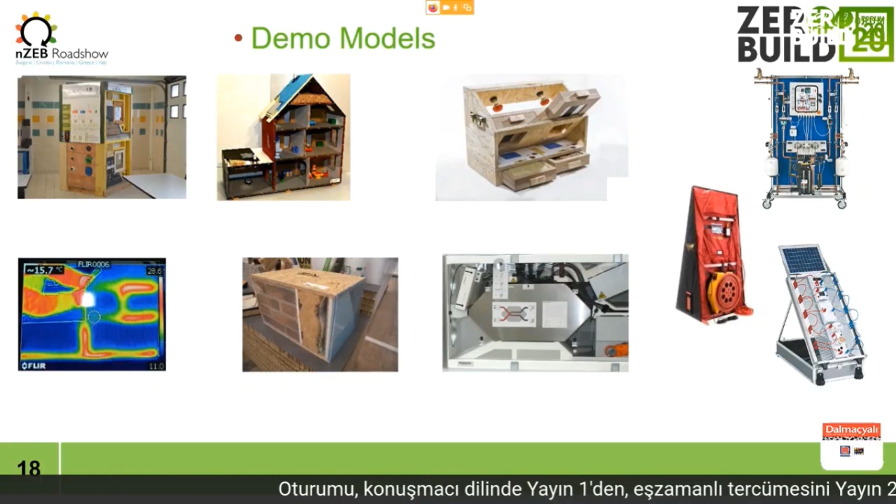Because of that, and because of the minivan, we decided to have a lot of small demo models - you can have everything. These show people how air tightness works, how we design the ventilation system, how we do a blower door test, how the heat pump works, how hot water works, how everything works. We can have everything in small models, take it in a minivan, and go for a week there. The most important thing for us is to discuss with as many people as possible.

Of course, this procedure is not only training and showing and practicing - we also say this is a game, not only because we want to speak with the younger generations, but also because we want to show older people and older professionals that we can play a little bit with this, and maybe then they will understand better.

And believe me, we will begin from the very, very beginning - the very first thing we learned as building physicists in university. What is this problem and how did we solve it?

We solved this. Why did we decide to hold the coffee from the plastic - I don't know how to say it. How do you say it, Yasemin, in Turkish, this equipment for Turkish coffee?

We put it - we cannot take it from the metal, we have to take it from the plastic. So this is physics and we cannot change it. So we have to design our houses in this way, otherwise we don't have a good example.

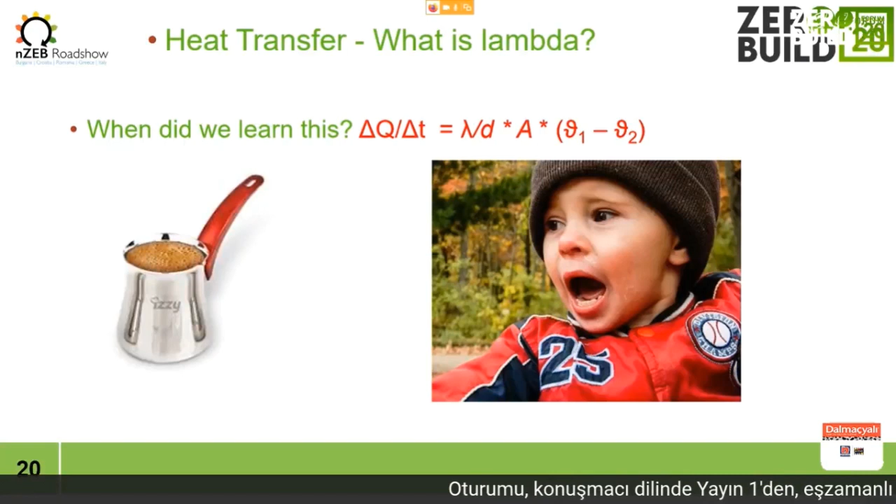So these were, since I see I'm running out of time, the small presentation of what we will do in the next couple of years. I can answer your questions later if you have any.

This program will have big support from several municipalities and cities all over the countries. Also in Greece we have very good support. More than that, this was the support during the proposal, during the issuing of the proposal. Now we have a lot more cities interested in this. We have already chosen our 10 cities.

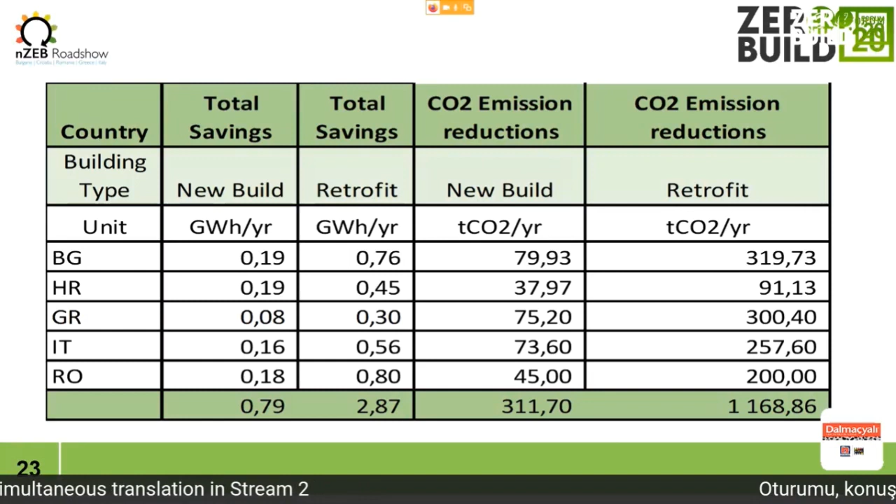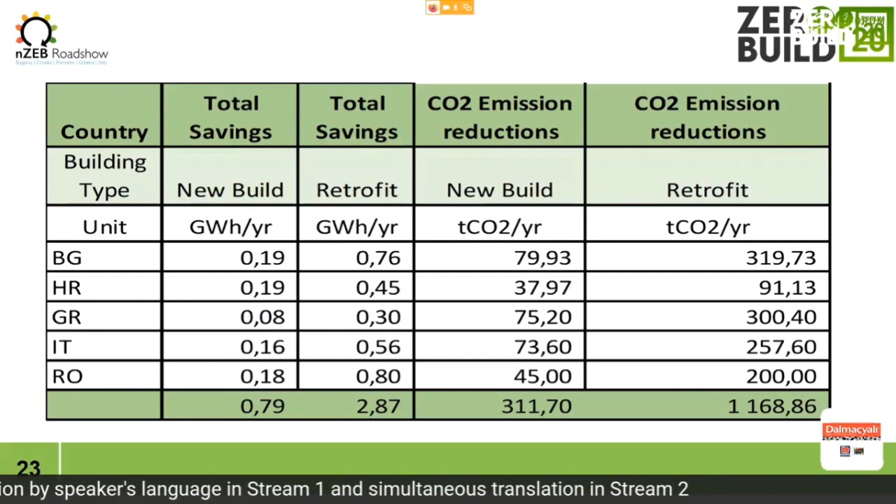Of course, as in every European project, we expect total savings of around 0.8 gigawatt hours per year during the project, and 1,168 tons of CO2 per year because of the retrofit, plus 300 more because of the new builds.

So this was my presentation for now. I hope we gave you enough experience to create similar programs in your countries. I'm also at your disposal if you want further information or support in this kind of roadshows. Thank you very much.

Thank you very much for this very interesting presentation, Mr. Pallantzas. So today, as you have seen, we have started from the regulations and went from the decision makers all the way to the end users. In fact, it has been a 1.5 hour very condensed information flow.

How we can start, how the regulations should be set, and how we can implement it in real life. Actually, there is one question to Mr. Pallantzas, and one of our guests has asked, what is the reason for not implementing this project in Athens?

Most probably because of the decisions. The first two parts, as I told you, train to nZEB, which was also 2 years, and fit to nZEB, which was also 2 years, all the activities were in Athens. So now, and also in the other countries, they were in the capitals of the country. So now we decided to go on a roadshow, and this was accepted by the European, by Horizon.